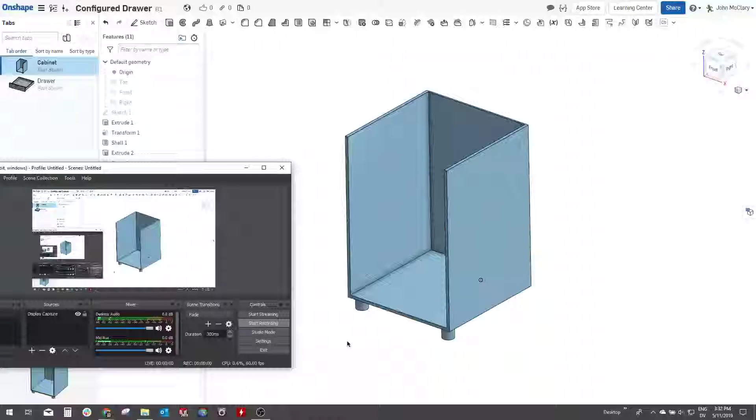Alright, let's take a look at what I've done here. We got a simple cabinet, and we got a simple drawer that takes a derived part of that cabinet so that we can stretch or grow this cabinet and the drawers will follow.

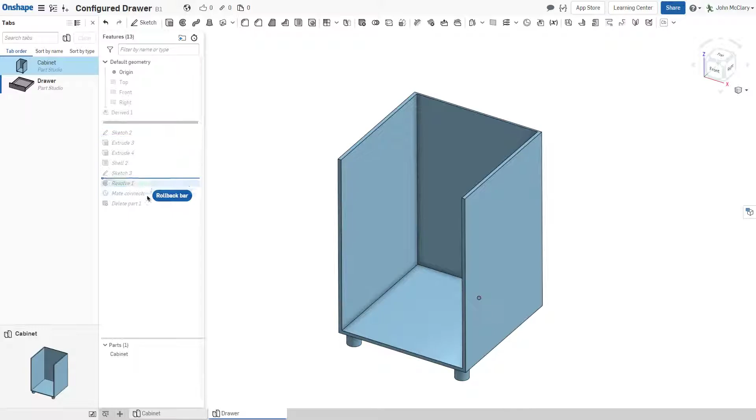I'm putting the first mate connector that's attached to the drawer off of this bottom edge, or the midpoint of that bottom edge, so I have a consistent reference. Then we'll delete the cabinet and we'll be left with the drawer with one mate connector that's offset enough to match all of our clearances and gaps, so we don't have to type anything in the main assembly.

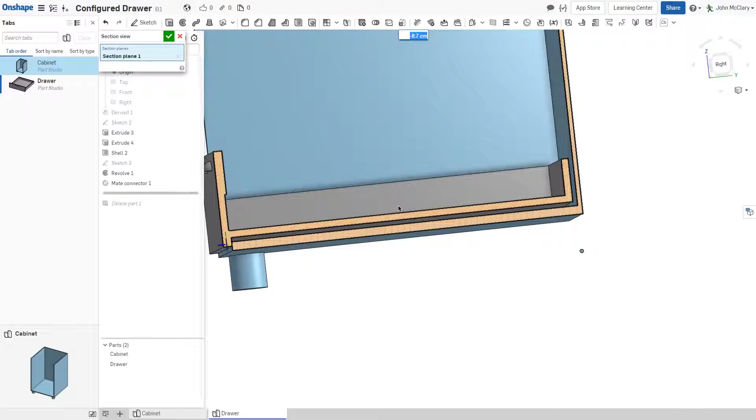If that makes any sense.

So we're left with the drawer. We'll start by configuring a handful of sizes. So we'll start with, let's see, 10, 20, 30, 40.

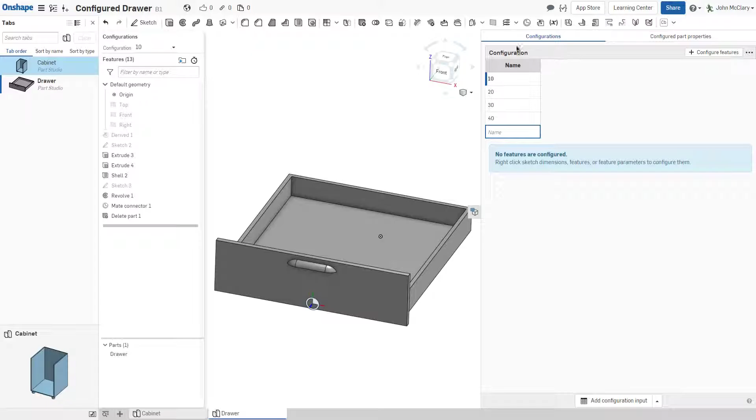Now this extrude right here is the only thing we're changing, so I'll edit this, right click and configure the depth, which is going to be the height coming from the bottom of the drawer up. And I have a second direction going down 1 centimeter just for the overlap.

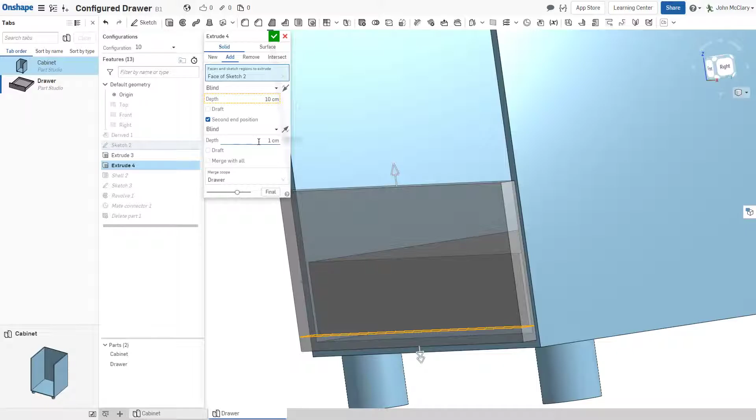So we'll have to add that centimeter. So technically that should probably be 9 centimeters, not 10, to give us a... because right now we're at 11 centimeters of drawer. So we'll change that here. So that'll be 9 centimeters, 19 centimeters, 29 centimeters, and 39 centimeters.

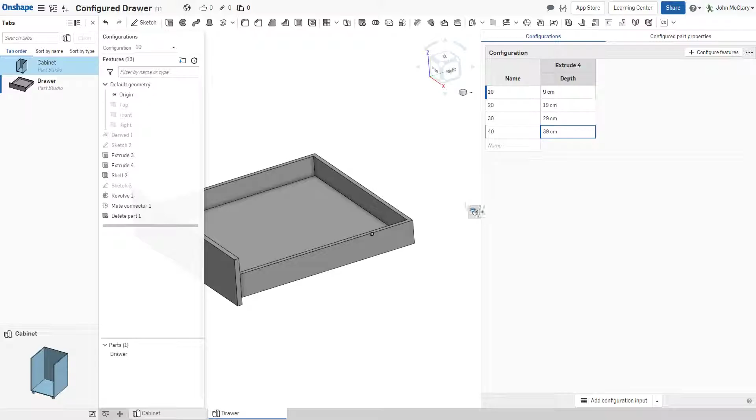Alright, simple enough.

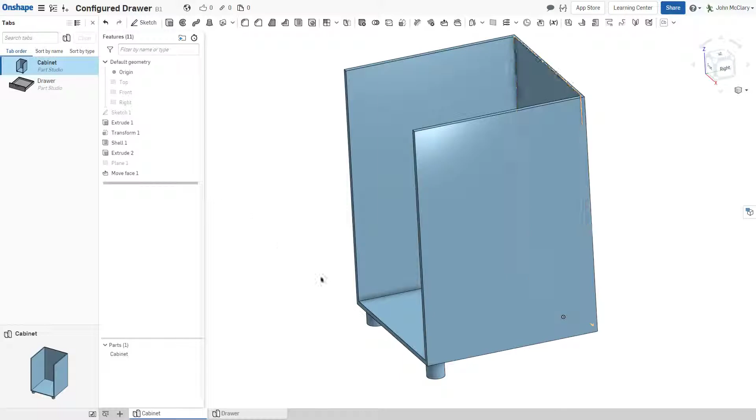Now in the drawer, we'll need to put mate connectors for every condition that it could be to go up, given the spacing of the drawer heights. So what I did is I created, to start with, a sketch on the midplane. We'll make sure it's facing perpendicular, and we'll call that drawer positions.

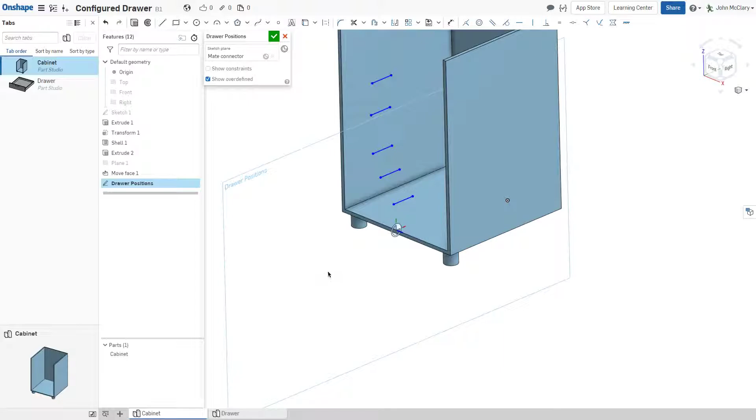Down here, I started by creating a bunch of lines, one for each drawer position. So I think I ended up with 5. So 1, 2, 3, 4, 5. Make them all equal, and make sure they're all in line.

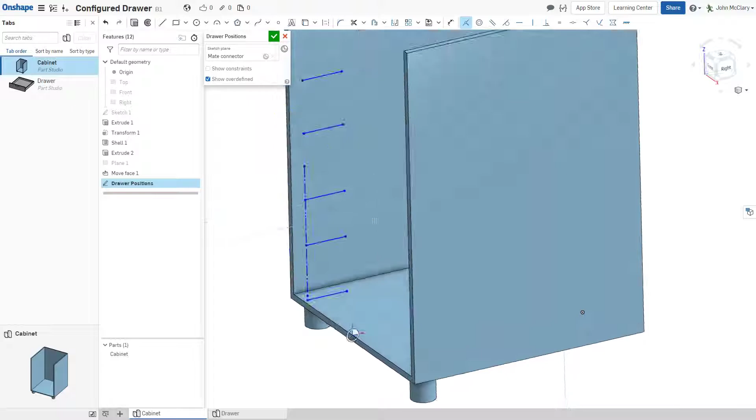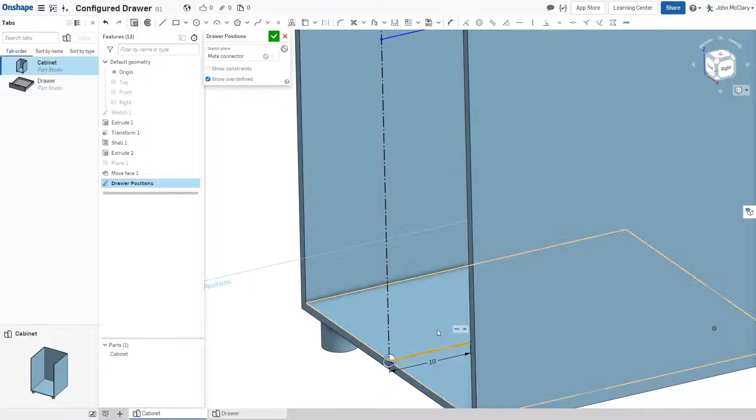And we'll use this front point to define our mate connectors. And we'll just throw a random dimension on here, just so it'd be fully constrained. Doesn't really need to be because we're only using that point, but I'd rather not have these flip inside out on me if we change the width in some weird way.

So now I create a dimension for each one of these, which will be the difference in height between each drawer layer. We don't care what these are right now, so we're going to set these all in configuration.

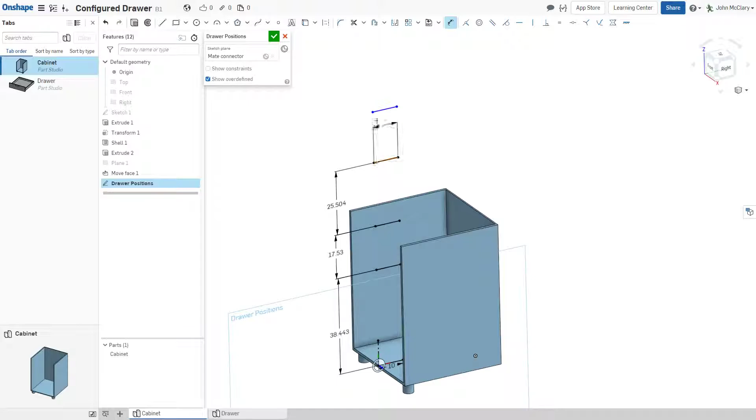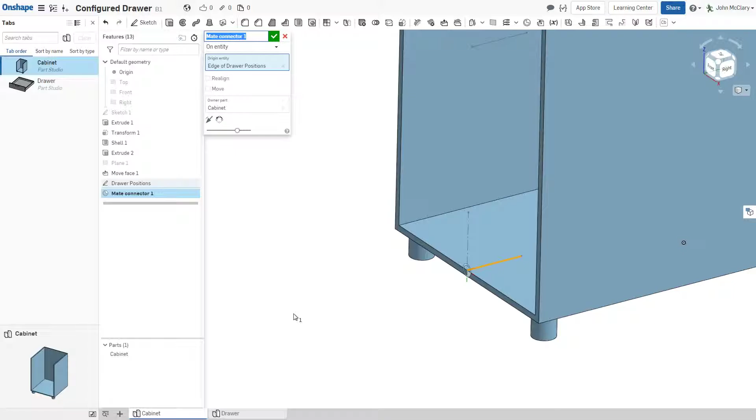Now we'll create some mate connectors, where the z-axis is going along this line. That's why I made it a line, so it was easier to set that. And we'll give them something recognizable, so we'll call this drawer 1.

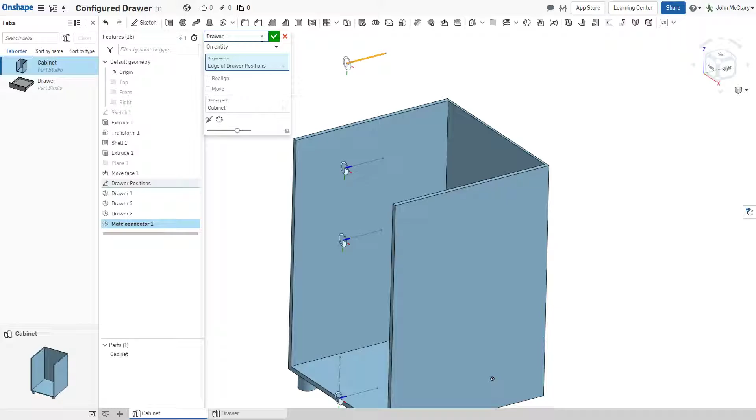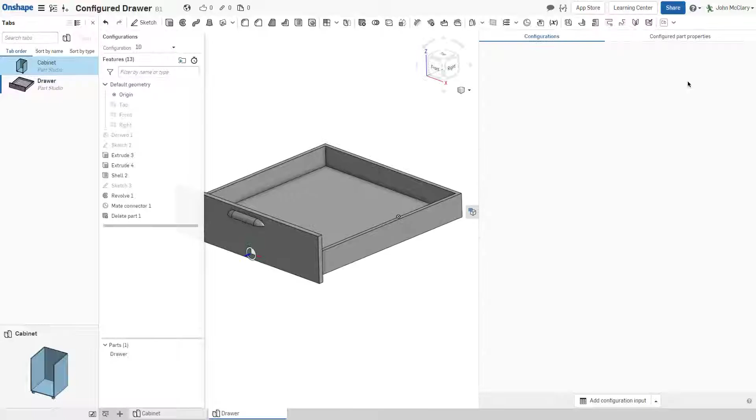Now we can set the spacing between each one through the configurations. And we're basically going to see how we are setting definitive sizes over here. We only have 4 different sizes to choose from. We'll keep using the list. So for each one, we'll give it a label. And each one could have any of these sizes.

Actually, starting with none, because if we don't need the 5th or 6th or whatever slot, then we want to delete it. So that's what the none is going to be for. So 10, 20, 30, and 40. Make one for each drawer.

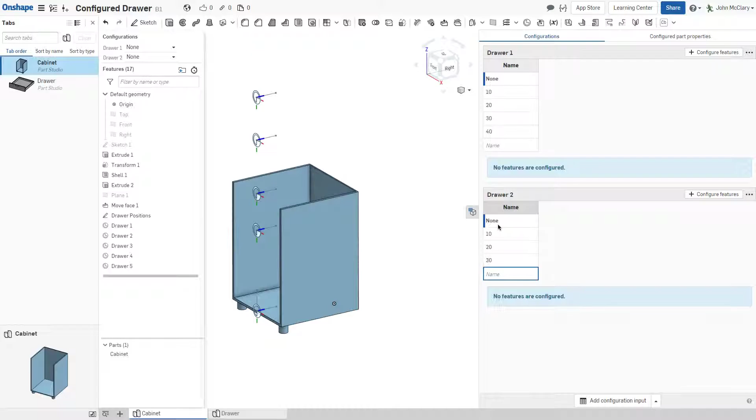Come on. Okay, new. Drawer 5. Okay, this is the last one.

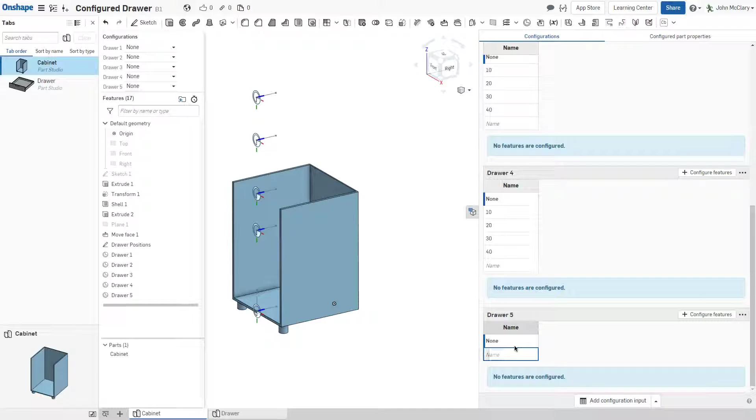Okay, so now that we have 5 different drawer configurations, we can set the heights for each. So we will edit the sketch, and we'll configure each dimension.

So this is the gap for drawer 1 to 2. So we'll configure that for drawer 1. Configure this for drawer 2, 3, drawer 4.

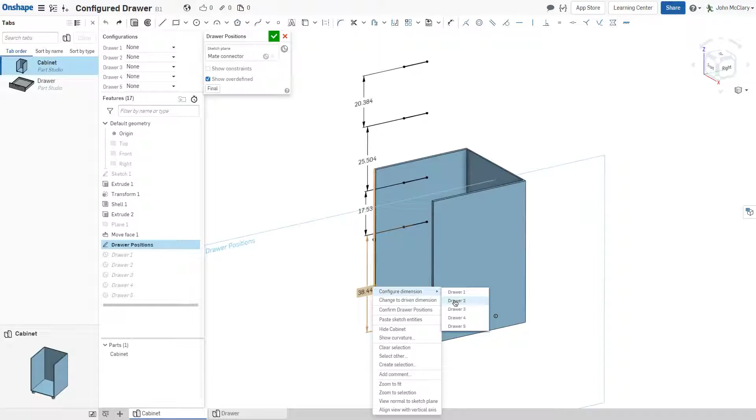Actually, I did that wrong, so undo that. It's the gap, so that means it's drawer 2's position. Drawer 3, 4, and drawer 5.

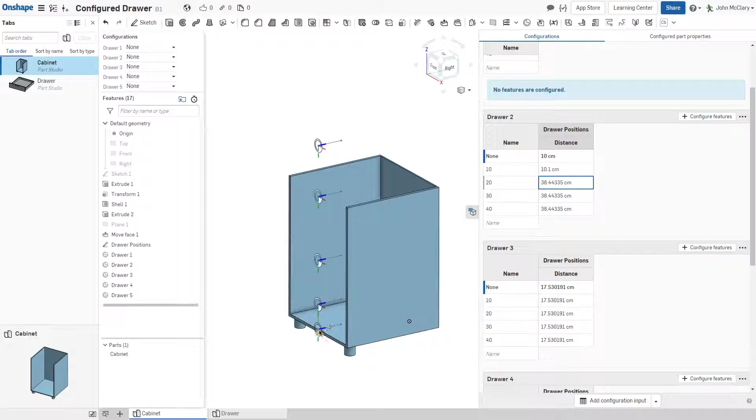So we'll set each one of these dimensions in the configuration. We don't care what it is for none, but we'll just give it a nominal number. 10 is going to be 10.1 centimeters to give us a millimeter gap between the drawers, so they're not line to line. So that'd be 20.1, 30.1, 40.1.

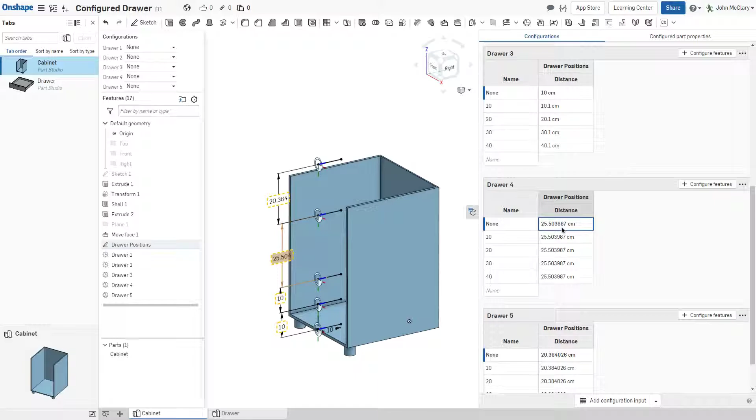Okay, so now when we change these, you'll see it'll change the gap between each one. It's hard to tell. It looks like this one flipped up over here, but that's not actually what happened.

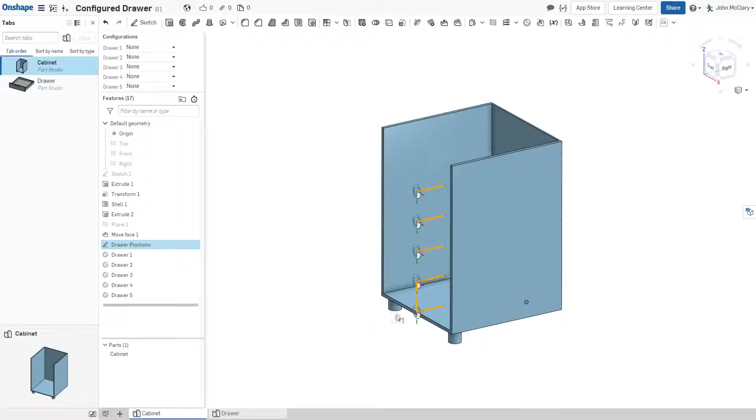It'll all 3 of these shifted together. Probably be easier if I showed this one going to 20, and then this one at 30. It's still hard to see. Either way, what we're doing is using this layout sketch to change where these positions are.

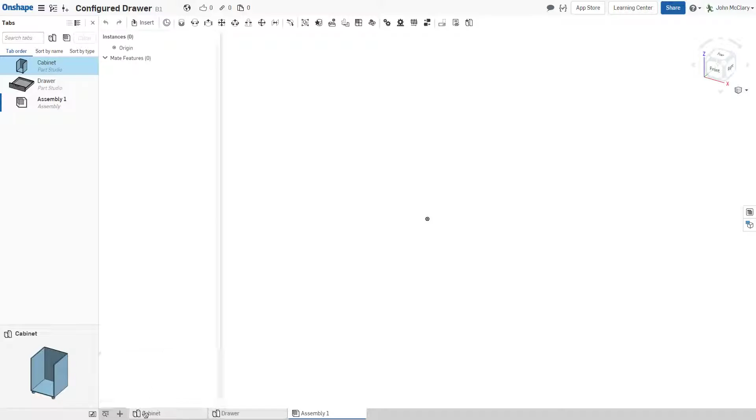And that's going to mate this connector right here with a slider, and we'll set the limit in the assembly. What else did we do? I don't remember off the top of my head, so we'll just go right to the assembly. And we'll insert our cabinet. Doesn't matter what configuration we insert it with. And same with the drawer.

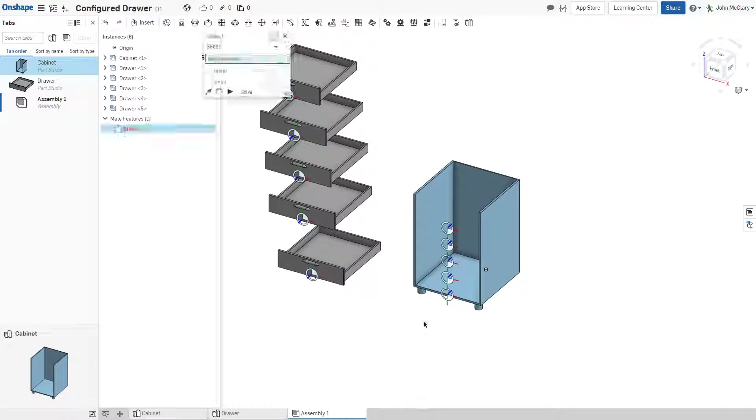Fix this in position so it doesn't move. Make a couple copies of this. So 1, 2, 3, 4, 5. And we'll create a slider mate for each one. Set its limit from 0 to 30.

If we had a configuration for the depth, then we'd set this to be configured to be whatever you need. I'm just doing 10 centimeters less than the depth. So that should give us a nice constrained drawer. I'll repeat that a few more times. 0 to 30.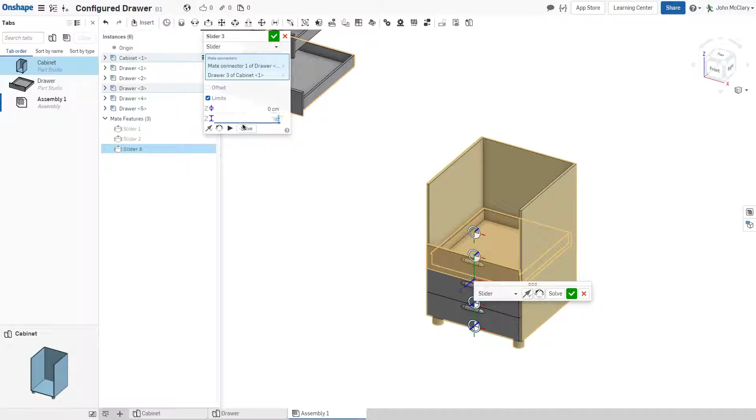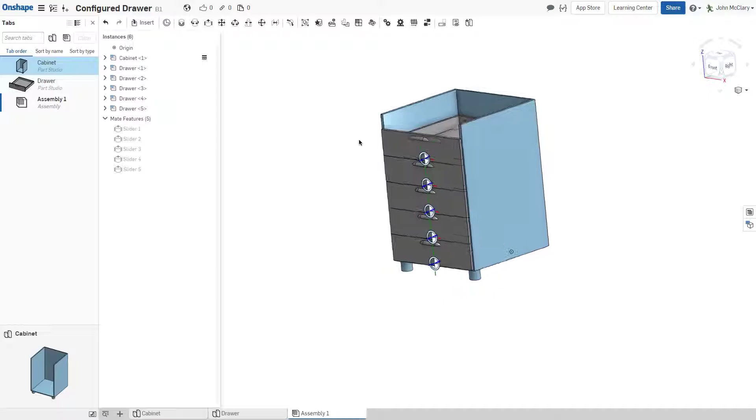And last drawer. Alright, so now we have all our drawers. They should have a millimeter gap, but it looks like they're line to line, so I must have did something wrong. Either way, you're going to set that in the cabinet side, configurations. Oh, it's because I'm set to none, that's why.

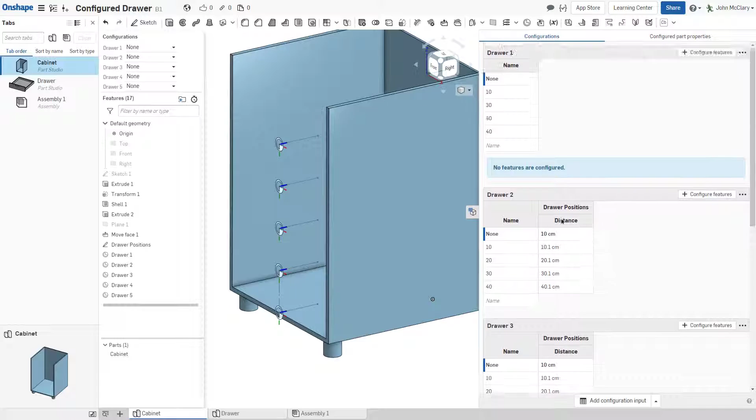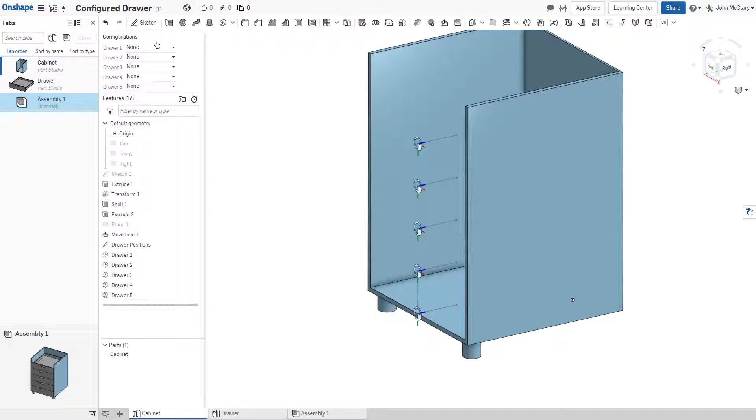That'll clean up later. Alright, so in here, we need to add all of these different configurations that we have in cabinet. So for drawers, we'll go from none to 40 in each one. And we'll label them the same way: 10, 20, 30, 40.

I was hoping I could copy and paste all of these, but... name drawer 4. And last drawer 5.

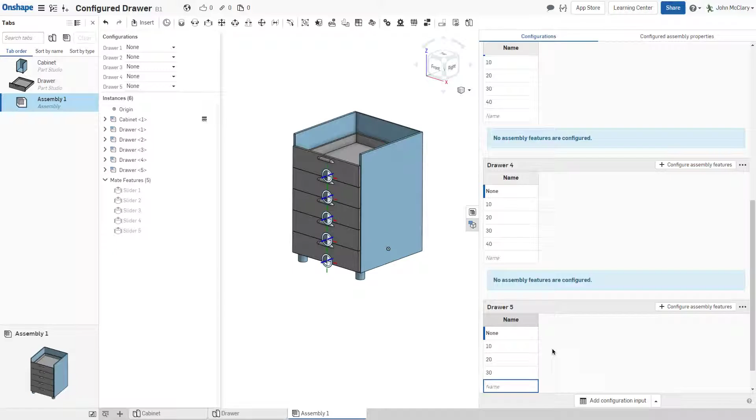Okay, so now we've got all of our configurations here. And we're going to set all of these to be configured to the suppression state when this is none. Because when it's none, we don't want to see a drawer. That way, when we get 3 drawers and the bottom 2 are tall, we don't have these random drawers above.

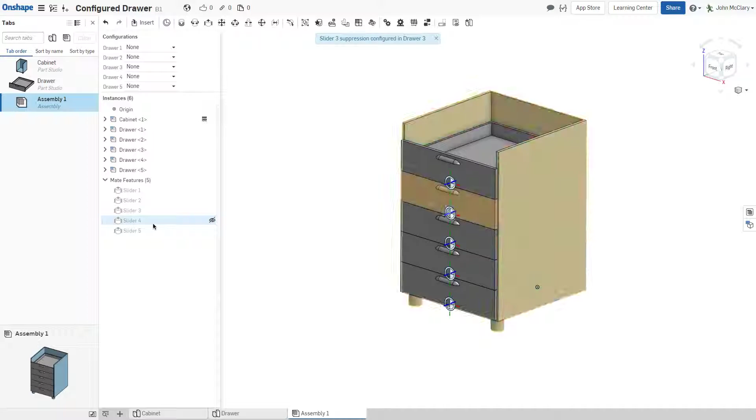So we can set all these by configuring to each one. So slider 1 is on drawer 1, so we'll configure suppression to drawer 1. Slider 2 to drawer 2, 3 to drawer 3, 4 to drawer 4, 5 to drawer 5. Okay, so now when these are none, we don't want a drawer.

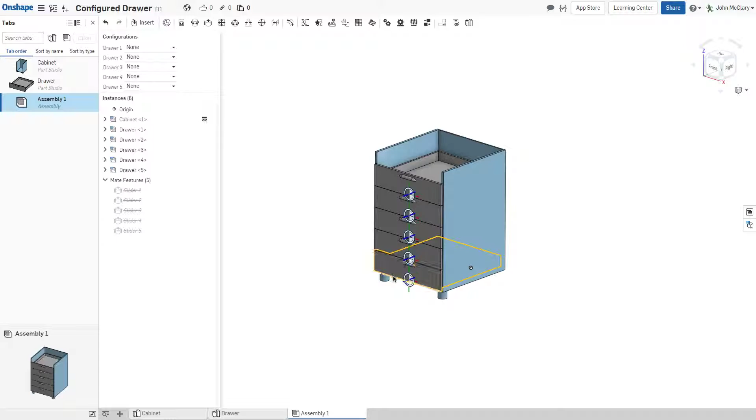Right, so that takes care of the slider mates. The reason you do the mates also is if you just delete the drawer or suppress the drawer and you don't have the mate suppressed, let's unsuppress that and suppress that. Then you get this red in the menu, and I hate seeing red, so we'll suppress that. Unsuppress that for now. So we did that for the mates.

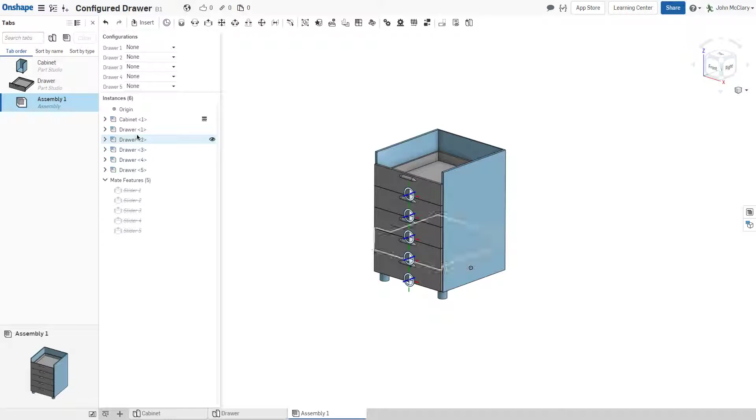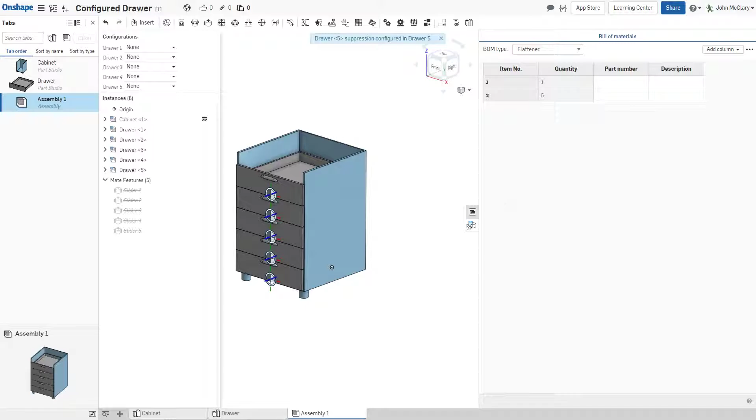Now we got to do it for the parts. Configure suppression: 1, 2, 3, 4, and 5. Okay, then we go back to our table, uncheck each one. Alright, so now the none configuration is working.

Alright, so now we have to configure the gaps, and we do that by configuring the cabinet. See how these are lined up to each other? That means we can actually configure these to be joined. So we'll configure drawer 1 with drawer 1 of the part studio, drawer 2 of the assembly with 2 of the part studio, 3 of the assembly with 4, and 5. And say OK.

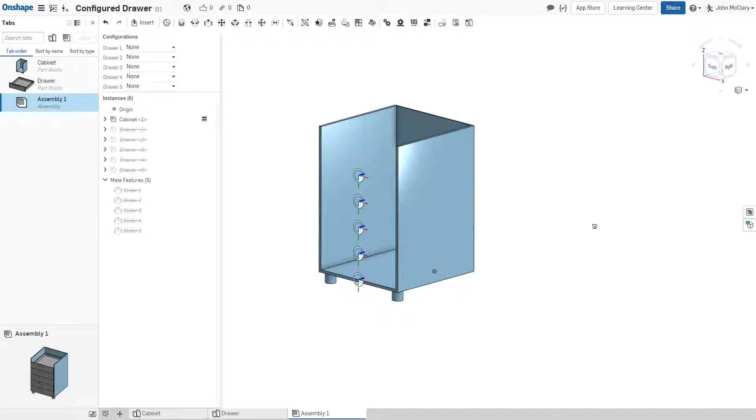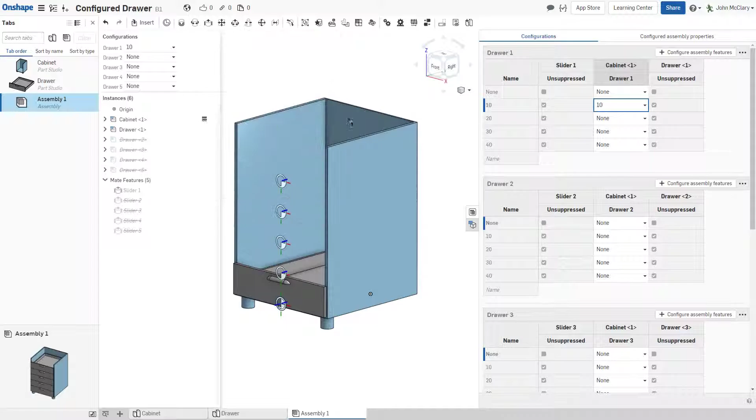So now, when I change these, nothing's going to happen yet because I have to go over here and specify when I'm in configuration 10, which is this row down here, you see. I want to use the configuration of the cabinet, which is change configuration linked to this row right here. So when I change this to 10, it should change that in the configuration of the cabinet, which will load that instance. It'll be a 10 none none none none instance of this part studio.

Which, well 10 doesn't really show you, so let's go to 20. I'll slide this gap up. Maybe I was right the first time. Let's change that.

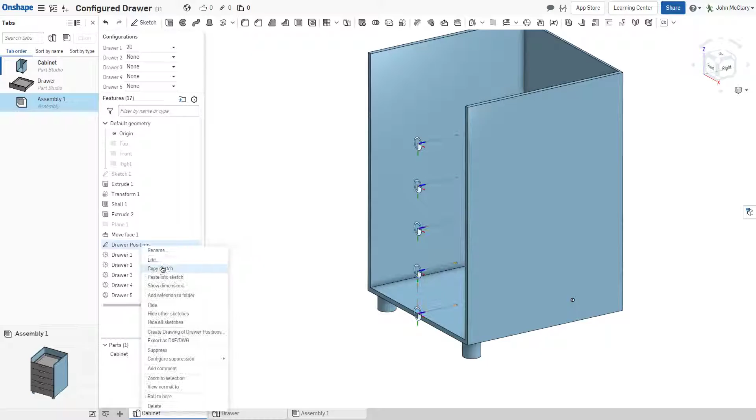So this is unconfigured. Unconfigure, unconfigure, unconfigure. Set that to drawer 1. Set that to drawer 2. 3. 4.

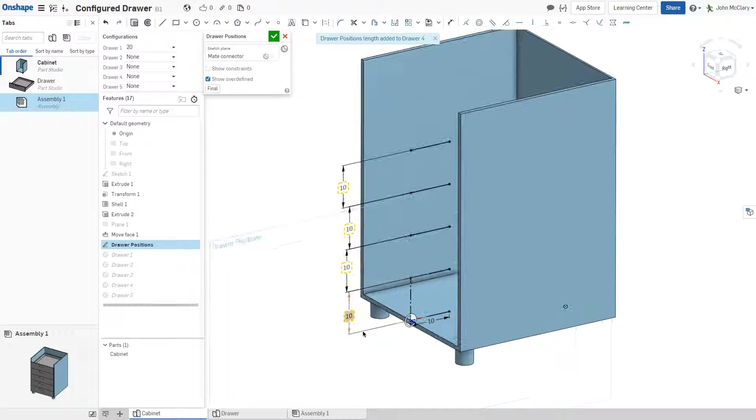So the way it was before, I had a little brain fart. The 10 represents the height of the door, not the gap between door 2 and 1. So probably a little confusing now because I confused myself.

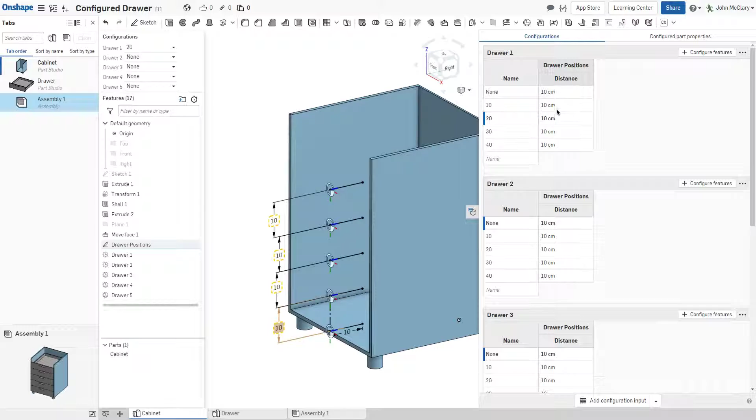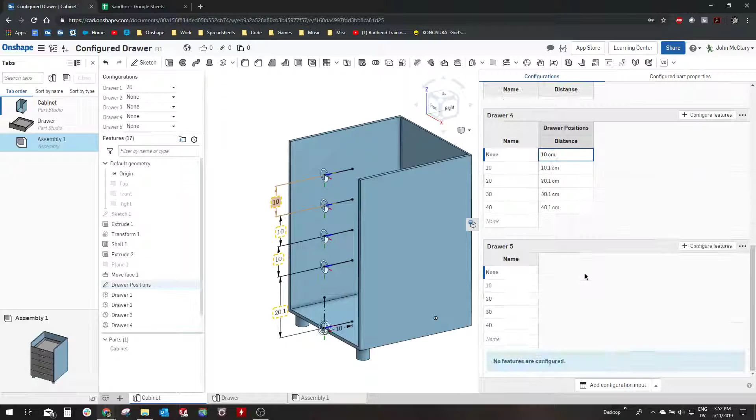Paste, paste, paste. Okay, so we have everything except for drawer 5 right now. Let's go back to the assembly.

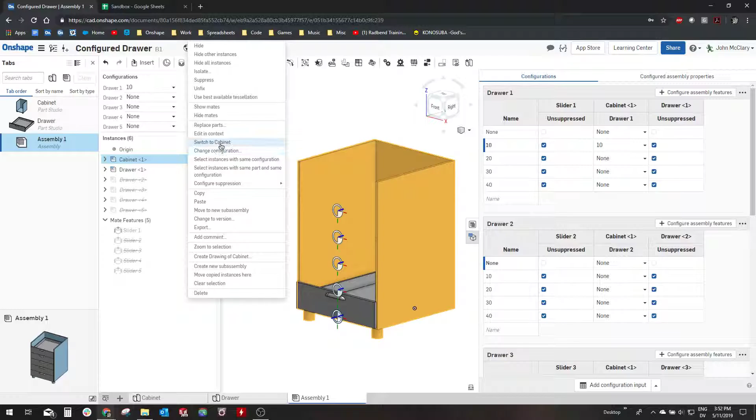So when we are in, sorry about all that, but when we are in configuration 10 of the assembly for drawer 1, we need to have the cabinet configuration of drawer 1 to also be 10. So that's what we're setting here.

So if we are in configuration 1020, this needs to say 1020. So 20, drawer 2, is representing drawer 2 over here as 20. So that would need to be 20.

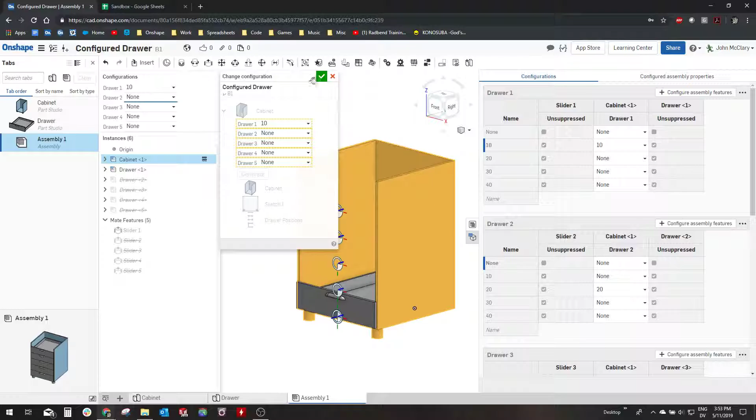But if this was back to none, it's reading this configuration here to none. I'm probably confusing you more. So basically you're just going to match these up, but I'm just trying to show you the connection and the relation and why.

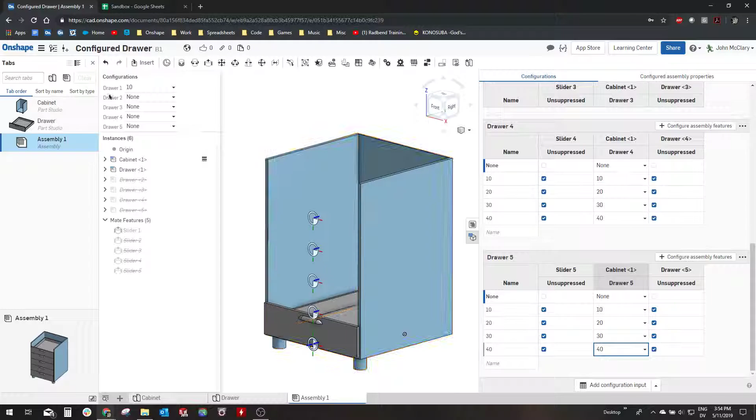Okay, so now when we're changing these around, you'll see that gap is 20 millimeter, or centimeters, because that mate connector has gone up, but right now the drawer is still coming in as a 10 centimeter drawer. So that'll be our next step.

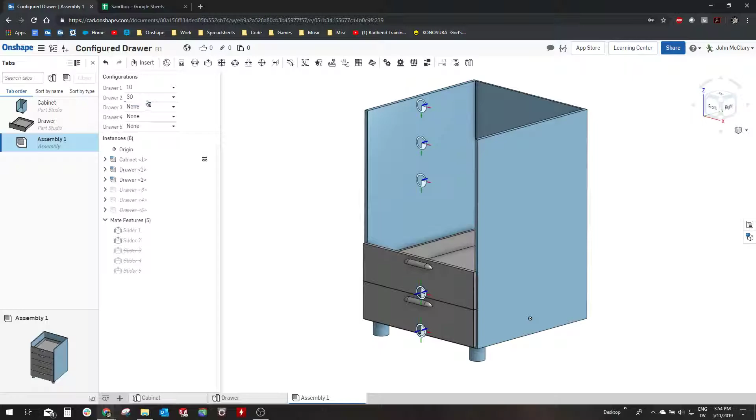So if we went to 30, you'll see these all shifted up another 10 centimeters. Set these to none, they should all disappear. So far so good.

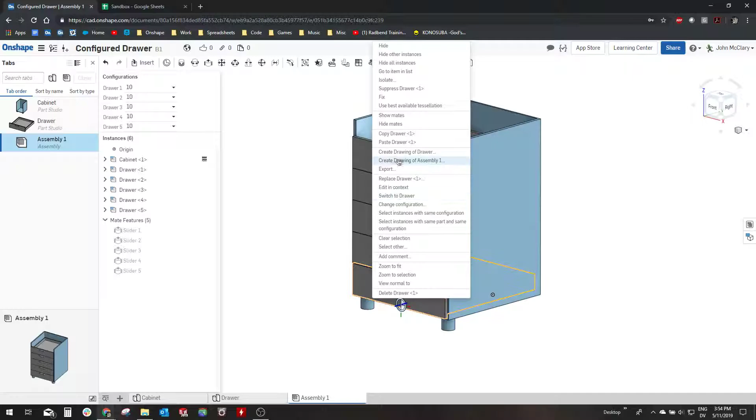So now let's set all these to 10 for now, just so we can have them unsuppressed while we're working. So now we need to configure each drawer to line up to whatever face height that we select here. So we do that by configuring, change configuration. We set, this is the first drawer.

First instance is going to be drawer 1. So this should be configured with drawer 1. Drawer 2, should be configured with drawer 2. Drawer 3, should be configured with drawer 3. Drawer 4. Drawer 4 and drawer 5.

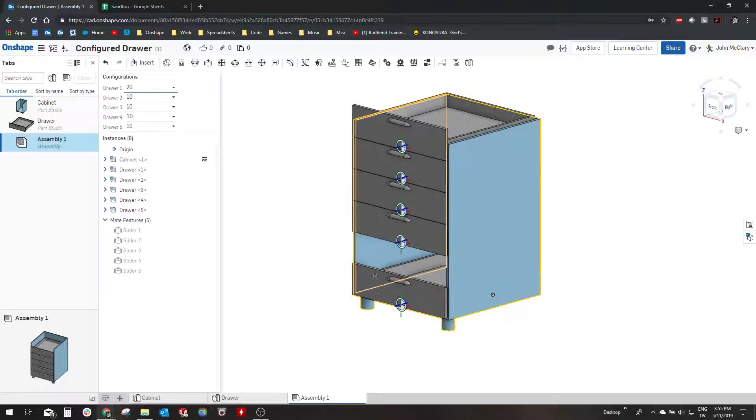So now if we change this to drawer 20, you're going to see it does not update the height yet because we still need to go over here and set that right here. So we have a suppression state, whether or not it's at none, and then we have the face height. This is all for drawer 1, this is all for drawer instance 1.

So we'll just match these up again. So when I'm at the assembly level configuration 10 for drawer 1, I want this instance configuration to be 10. When this is at 20, I want that to be at 20. When it's at 30, I want it to be at 30. So we just go through and match everything all the way down the line.

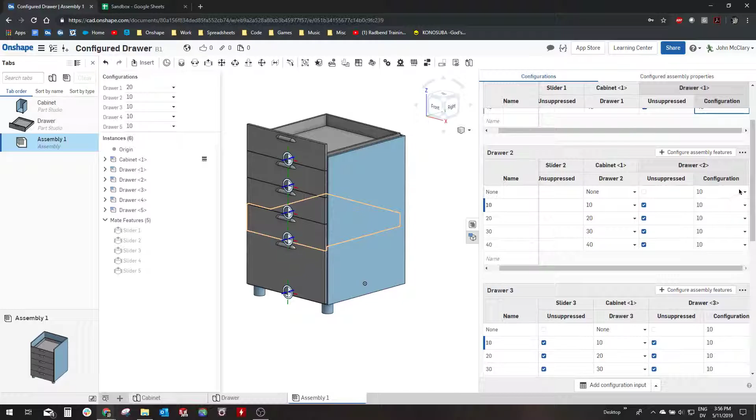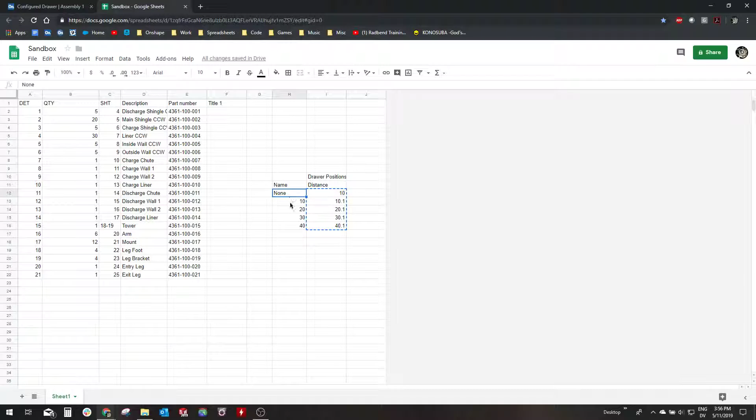Copy paste is your friend.

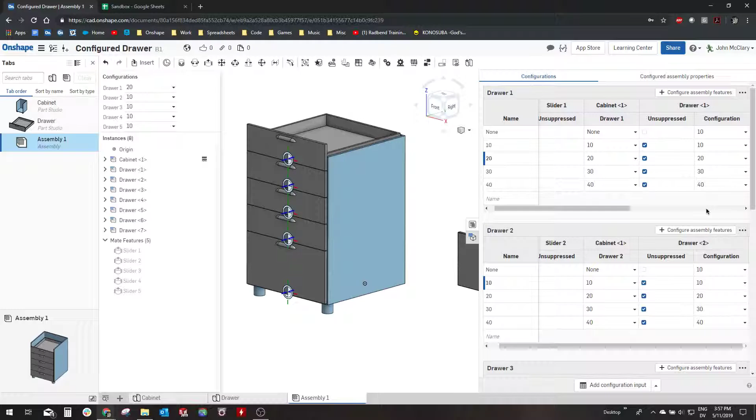Ten, 20, 30, 40, 10, 20, 30, 40, 10, 20, 30, 40, 10, 20, 30, 40. And it looks like we still got a bug in copy and pasting into configurations. I know they just fixed it for the BOM, but I'll make sure I report that one. So we don't have a drawer 6 or 7.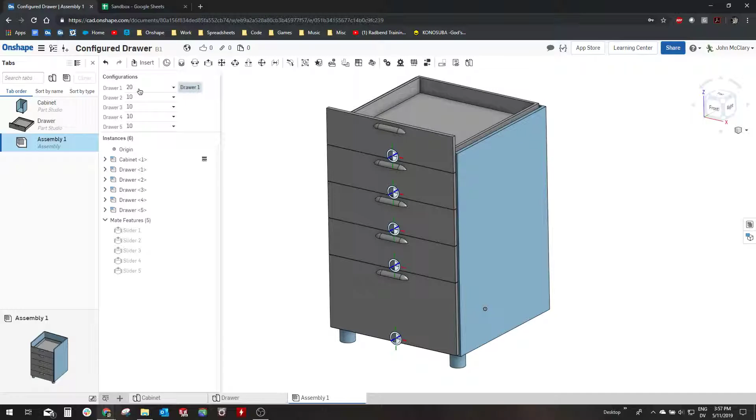Okay, so now this should be 20 because that one's at the 20. That gap will go up 20 millimeters because we set the first drawer to 20. That all makes sense. So if this goes to 40, everything should slide up. Second one goes to 20, everything slides up.

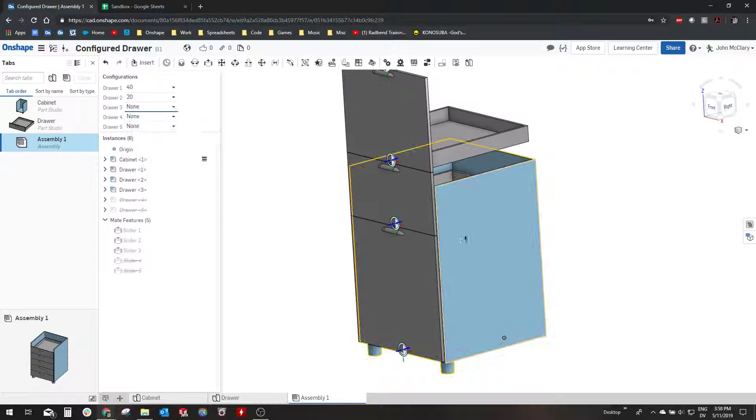So basically it's going to be up to you to choose whatever matches your drawer height, and you'll just have to set everything to none that's above that. And we can hide the mate connectors. Maybe. There it goes.

So yeah, simple as that. Let me know if you have any more questions about it.